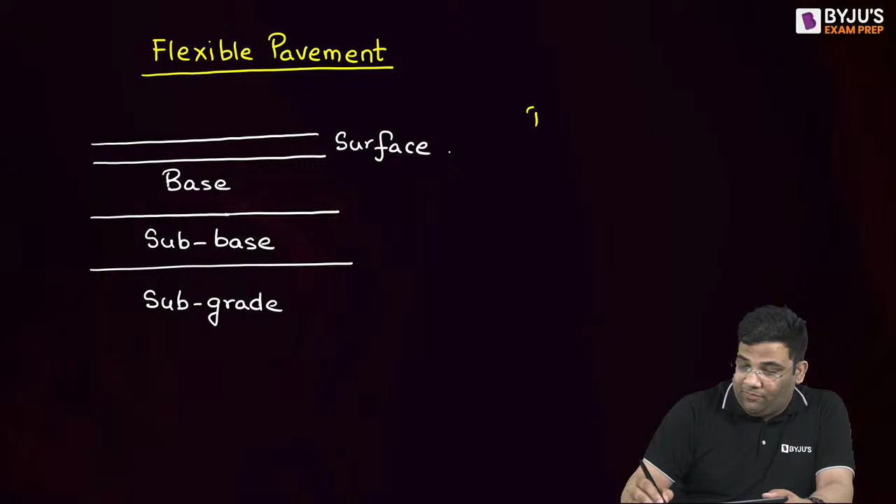The thickness of these layers, that we call the design. When I say design, I am telling the thickness of these layers, the thickness of various layers.

Now tell me, the thickness of layers will depend on what? Give me some idea, you also contribute. Tell me, the thickness of the layers will depend on which factor? Write in the comment section, let us see what are the answers.

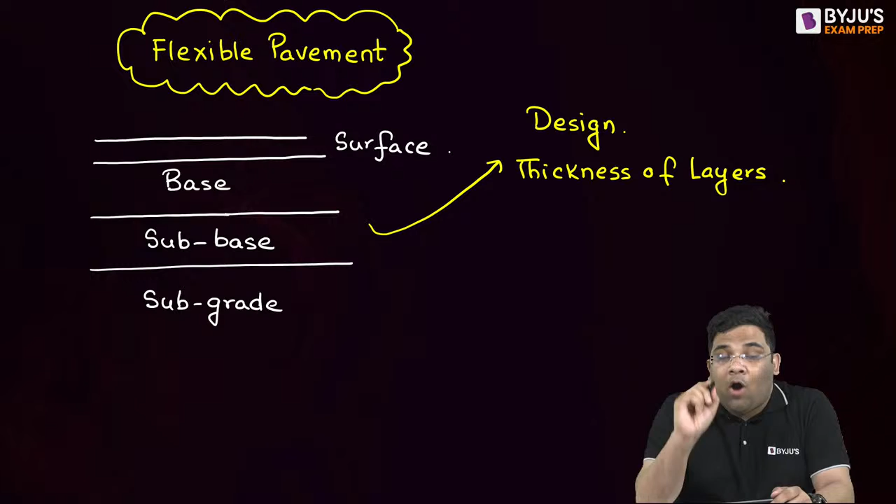Obviously this will depend on many things, but the prime factor is the traffic - how much traffic this particular pavement will be catering to. Based on that, the strength and thickness of the various layers will be decided.

So the first and foremost important thing is the design traffic on this particular road. Suppose I am giving it the name T, design traffic. So the traffic will decide what will be the strength of different layers, what will be the thickness of different layers. Therefore in your GATE examination and many other examinations, they ask questions about your design traffic - what will be your design traffic?

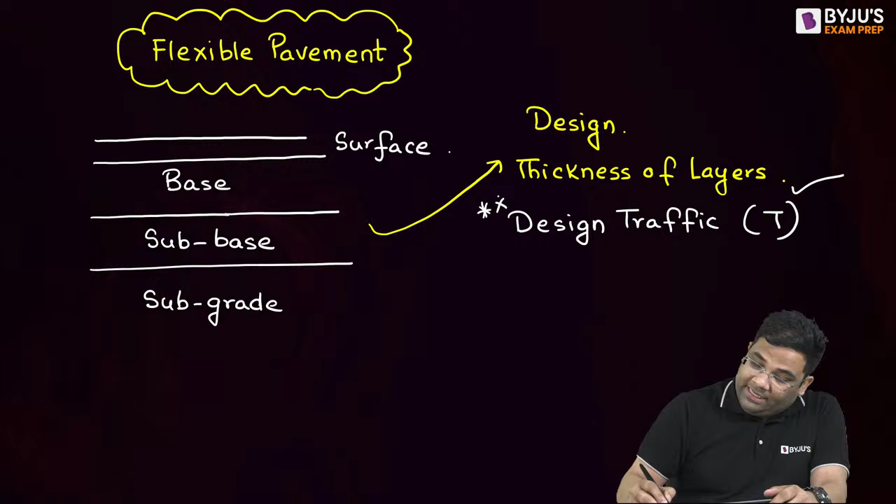Okay, so let us understand how to find out this design traffic T as per your code. Let us start it.

Suppose you want to construct a road between A to B. Now, between A to B, there will be some existing road. That road might be an old road, or it might not be catering to the current traffic, but there will be some road existing already between A to B.

Now from A to B you can do a survey - A to B and B to A, two-way traffic. You will do a survey and find out the daily traffic of A to B and B to A. So in the survey, you will get the daily traffic between A and B.

You will do a survey and find out the daily traffic between A and B. Suppose you are doing this survey - suppose today's date is, sorry, 2022, yes. Suppose you are doing it on October 1. Suppose from today, yesterday, tomorrow you are doing the survey, and this is 1st October 2022. You are conducting this survey, and in this survey you are getting some traffic.

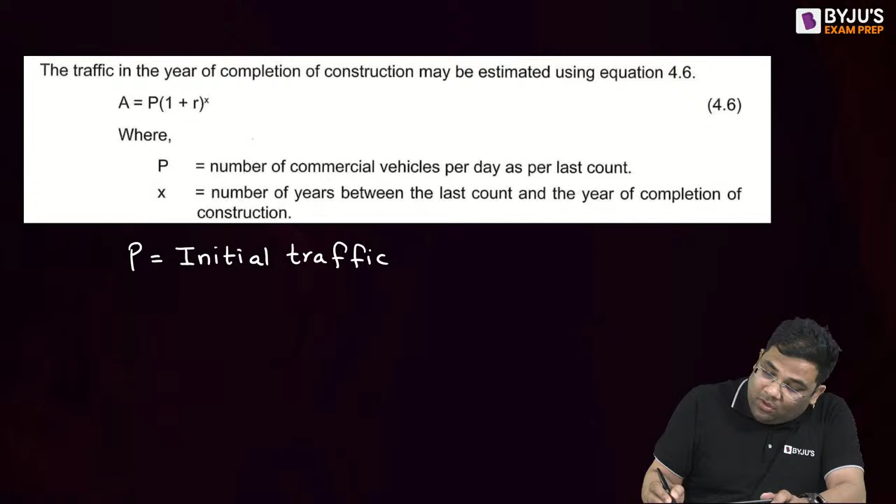P is the initial traffic on the survey day, unit will be CVPD, commercial vehicles per day. And A is the initial traffic on the opening day, the road opening day, when the road opens after the construction.

This is very simple, like amount and principal, which we studied in childhood, right? So this amount is 1 plus R, where R is the annual growth rate of vehicles, and then to the power X. Understood this formula?

Now this is from code, this equation I am not telling, the code is telling. This is from page 17 of IRC-37. Now everybody has understood the terms P and A.

So the road has opened. Suppose the road has opened on 1st April 2023. And on the opening day, the traffic is A, equal to P into 1 plus R to the power X.

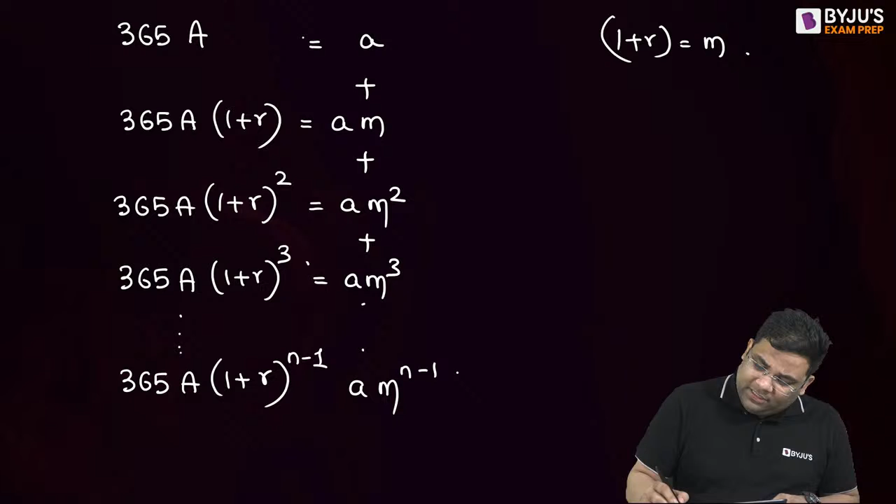Now see all this, you are adding all this to get total traffic. Now tell me, this is nothing but a geometrical progression, right? A, AM, AM square, AM cube - yes, this is nothing but a geometrical progression.

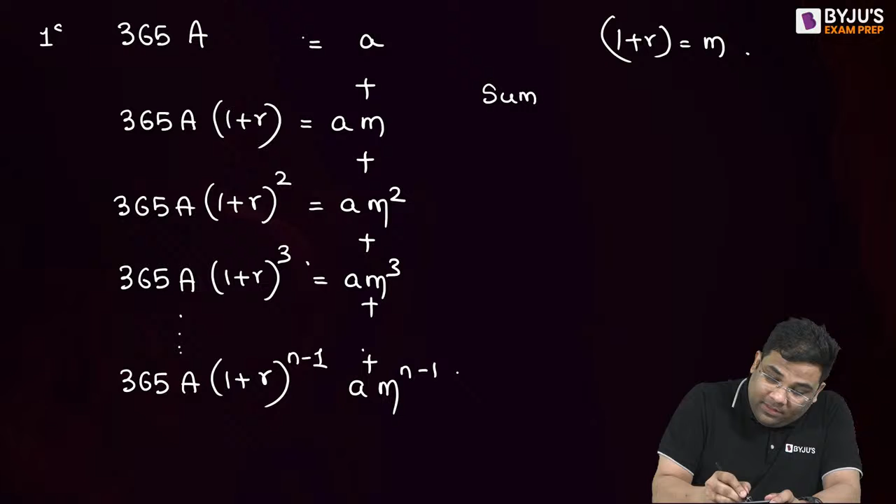And how to find out? These are N terms. This is the first term, and this is the Nth term. So what will be the sum of N terms of this progression?

The formula is, let me write it down, you might have forgotten. The formula is A, the first term, into the common ratio - this common ratio, M is common ratio, remember childhood? Common ratio to the power number of terms minus 1, divided by common ratio minus 1. This is the formula for finding sum of n terms of this geometrical progression.

So when I put the values, A is 365 capital A. M is 1 plus R to the power n. Then minus 1 divided by M minus 1, which is 1 plus R minus 1. So this 1 gets cancelled. I get this term. Does this term look familiar to you? This is 365A into 1 plus R to the power n minus 1, divided by R.

So this is the total traffic in the design life of that particular road. You have to remember this formula, but I derived this formula for everybody's understanding.

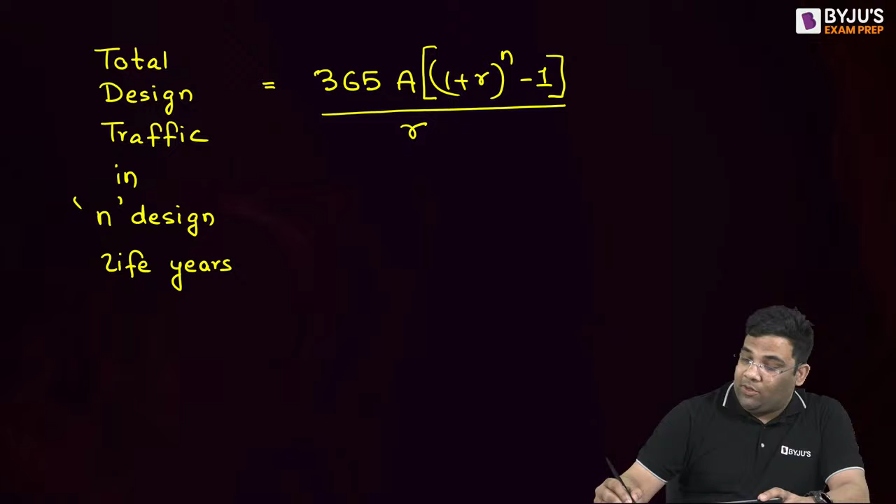Now what is A here? A was P multiplied by 1 plus R to the power x.

Now I will ask you all about this term, you will answer in the comment section. Let us start. I will ask you, what is P? Write in the comment section so that I understand you have understood. Write down what is P, write down full.

Yes, I can say this is the initial daily traffic on survey day, or before the construction, or sometimes they write on last count. Last count means when the last counting was done, and that is on survey day only, right? See the language of the code - as per last count. Last count means when the survey is done.

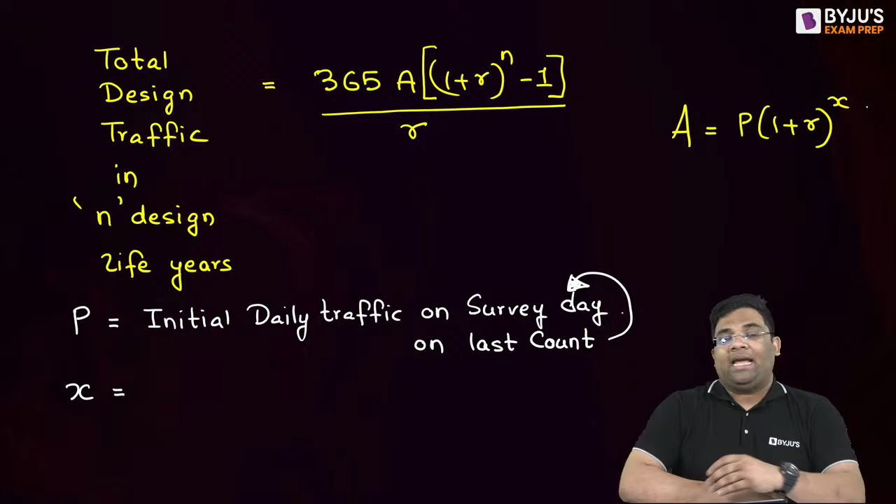Now tell me what is X. Tell me what is X as per understanding from this. I'm waiting. So much time went, right? Okay, writing. Some are watching movie, no movie, please write the answer. What is X?

Time interval between survey, difference of year between survey day and opening of road. Yes, so I can say this time, and this time we will take in years. Very important, this time will take in years. If it's given in months, convert to years. Time in years between last count and opening day. Or I can also call this as the construction period - sometimes it will be equal to the construction period, right?

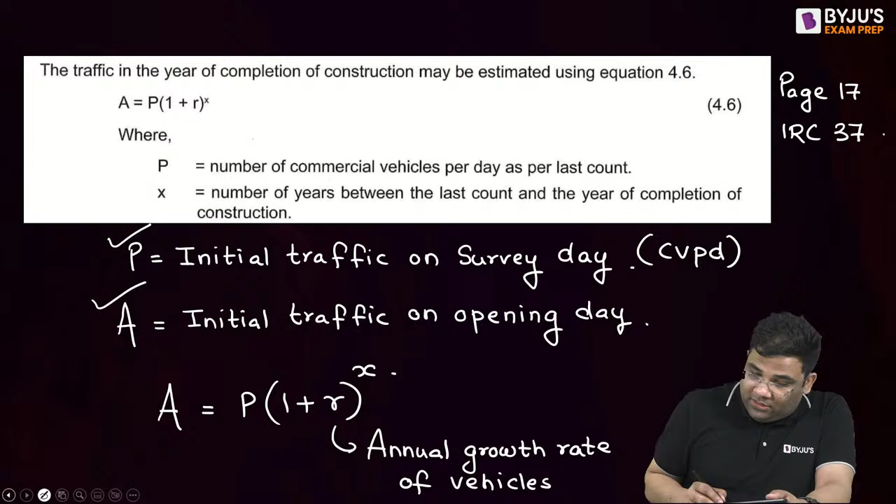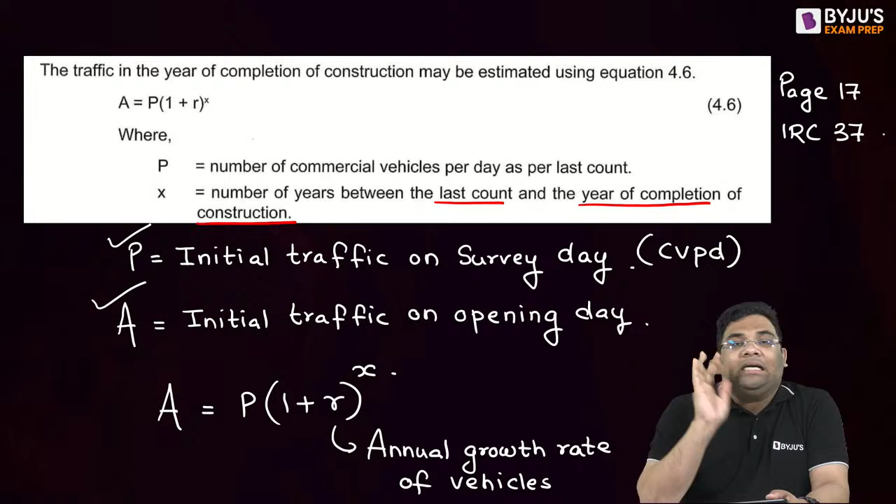Construction period - let us see what code uses. The code is writing number of years between the last count and the year of completion of construction. Same meaning, last count and the year of completion of the construction. Yes? Okay, very good.

So we got our traffic equation also we got. Now tell me, suppose we have, normally roads are multi-lane roads, right? Now roads are what - 2-lane, 3-lane, 4-lane, yes, roads are multi-lane. Tell me, whatever design traffic is coming, will all the traffic pass through a particular lane, or will there be distribution of traffic in these lanes? Yes or no?

It is an interactive session, so be attentive. Yes, so I can say yes, this traffic will be distributed into various lanes. Yes, it will be distributed into various lanes. Okay, so how the distribution happens, that we will understand now. That is very important for your examination, how the distribution of traffic happens.

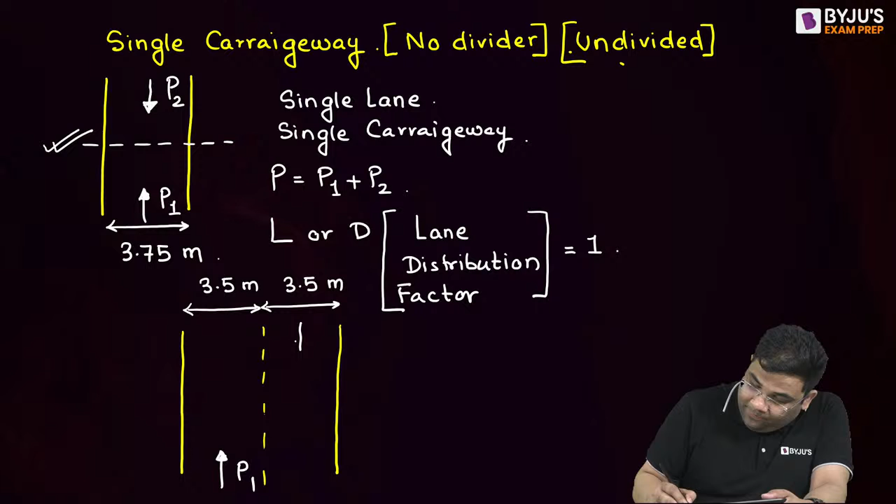Suppose the vehicular movement is P1 here and P2 here. This is known as two lane, but single carriageway. Single carriageway means there is no divider.

So what is this line then? This line is just a line on the road only, there is no divider. What is a divider? Divider means there will be a proper divider like this, with some trees. If I see the cross section, an undivided road will be looking like this, where only some paint work has been done at the middle.

Now divider means there will be some divider here, like this, you see. There will be some construction like this, and some tree will be there. Not such a big tree, just we can say some plantation will be there, some demarcation is there.

So what is the difference now between divided and undivided? If it is undivided like this, just a line is there, a painting is there. Tell me, can P1 go this side, and then P2 can also go this side? Yes, they can go.

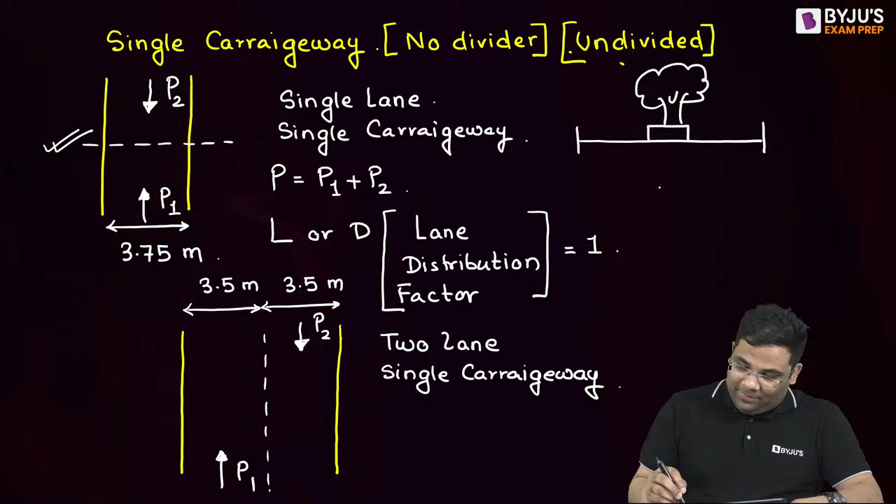Now you will say, sir, we should follow the rules, they should not go. But this 'should not go' is a very idealistic notion, and we don't live in an idealistic world. So that doesn't apply. We cannot say should not go, if there is provision, they will go. Suppose the road is empty, this P2 can go that side. But if there is a proper divider, then P1 and P2 cannot cross to the other side.

Understood the difference between a divided and an undivided highway? Very good.

So when it is undivided, tell me how much traffic I should consider for a particular lane design. Should I consider P1, or P1 plus P2? Tell me, since we are studying single carriageway only, what traffic will I consider? I will consider P1 plus P2, because both traffic streams can pass through this particular section.

Both can pass because there is provision for them to pass. So in undivided, whether it is single lane or two lane, doesn't matter, the traffic considered will be P1 plus P2. This means the total traffic will be the addition of traffic moving in opposite directions. Now, the lane distribution factor here will be how much?

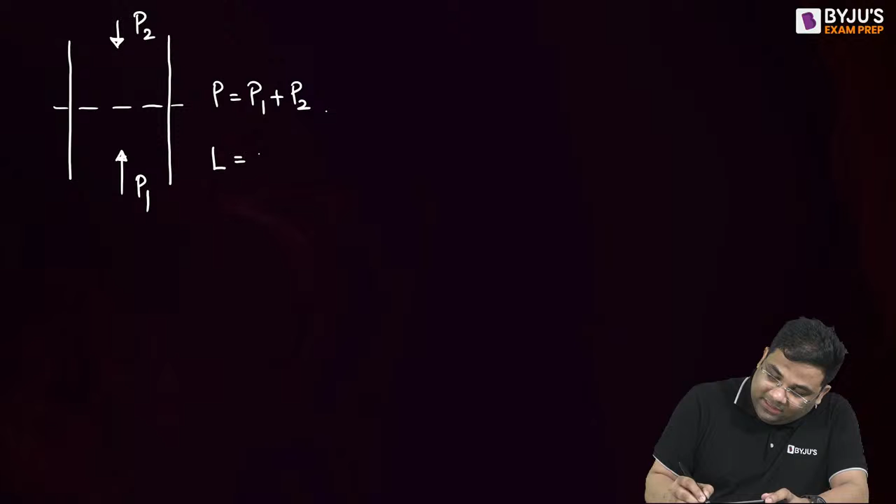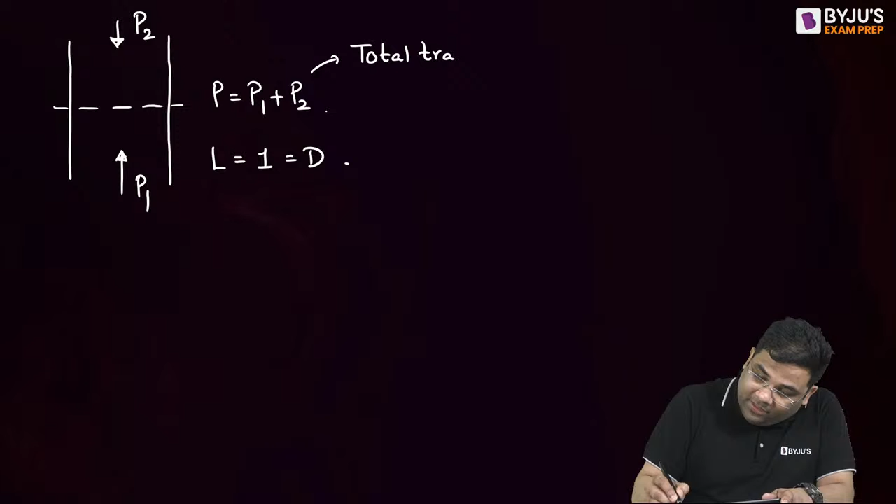So first, what did the code tell? If it is a single lane, then everyone has to pass. So P1 and P2, total traffic is P1 plus P2. L will consider distribution factor as 1, either expressed as L or as D, lane distribution factor. Means there is only one lane, na? Yes, see, this is total traffic, and all the traffic is distributed into this particular lane.

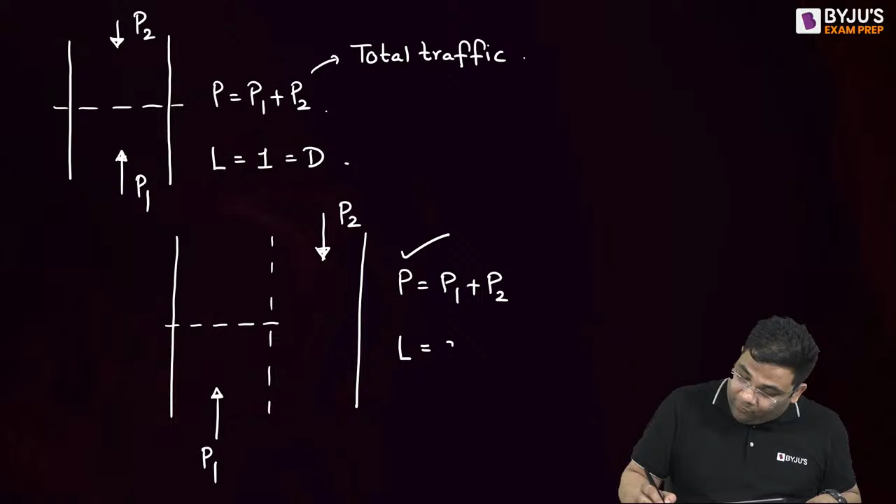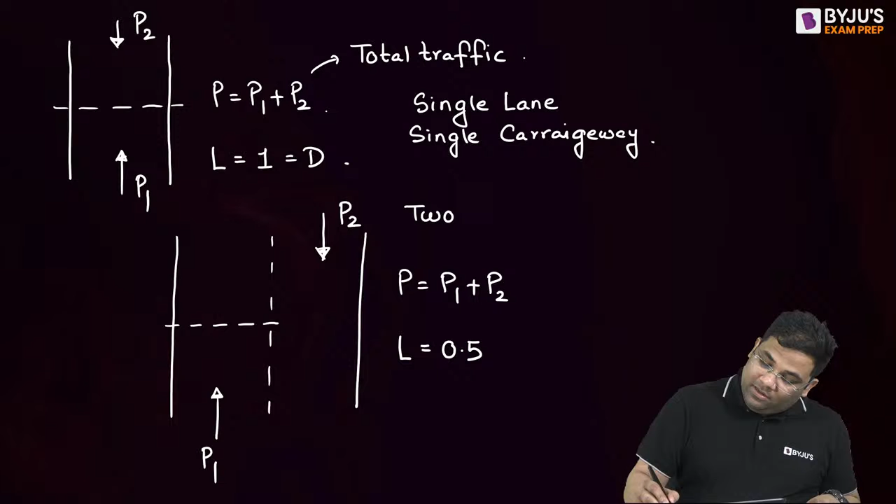So there is only one lane. Then what did code tell about? About your two lane undivided roads. Here it is P1, here it is P2. So total traffic consideration will be P1 plus P2. But if we consider a single lane, a particular lane, then only 50% of this P will pass through it. So L is how much? 0.5. Everybody understood the difference between single lane single carriageway and two lane single carriageway.

It's clear or not? Tell me. If it is clear, we'll move to the next thing. Yes, we will go to the next thing. That is what? That is your four lane single carriageway.

4-lane single carriageway means what? Only the signs will be there. The sign will be there. Painting will be there on the roads, you might have seen such roads, right? But there will be no permanent demarcation, right? There is no permanent divider, no divider, undivided. Single carriageway means undivided, remember that. So this is 4-lane undivided, or I will say your 4-lane single carriageway.

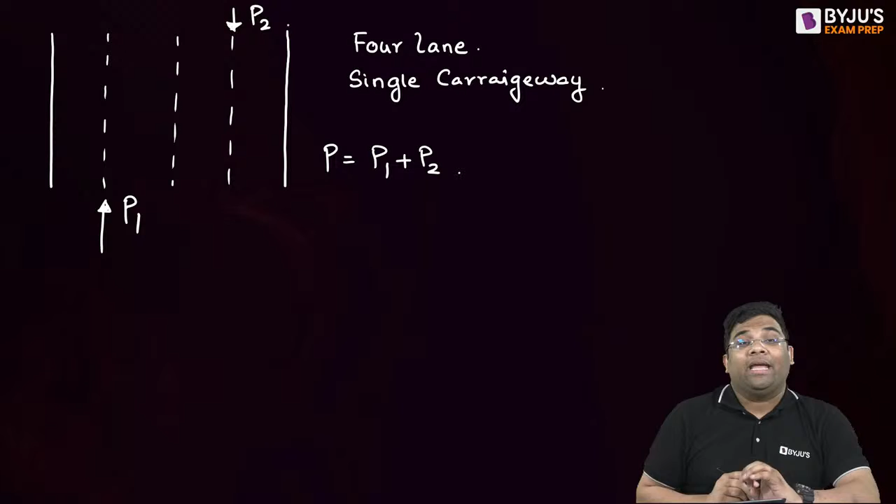Okay, now here suppose traffic is P1, and here suppose traffic is P2. Now this P1, P2 can pass anywhere, right? So total traffic consideration will be how much? P1 plus P2. But if I consider only a particular lane, so what will be the lane distribution factor? Tell me from your common sense, what will be your lane distribution factor for one of the lanes?

Why 0.5? For one lane. Arey, write down, Baba, you are not giving exam. Be interactive, Baba. You might be wrong, na? Who is killing you? Nobody is killing you. Why are you so afraid? Write down whatever you feel.

Yes, the distribution factor should be 0.25. You see, this P1 and P2 can pass through any lane, it can pass through any lane. But code has to come to a particular conclusion about how much should pass through one lane. And there are 4 lanes, so I can say that 25% will pass through each lane, yes or no? See, when it was single lane, we said total traffic is P1 plus P2, and since there is only one lane, all have to be distributed in this lane only, therefore lane distribution factor was 1.

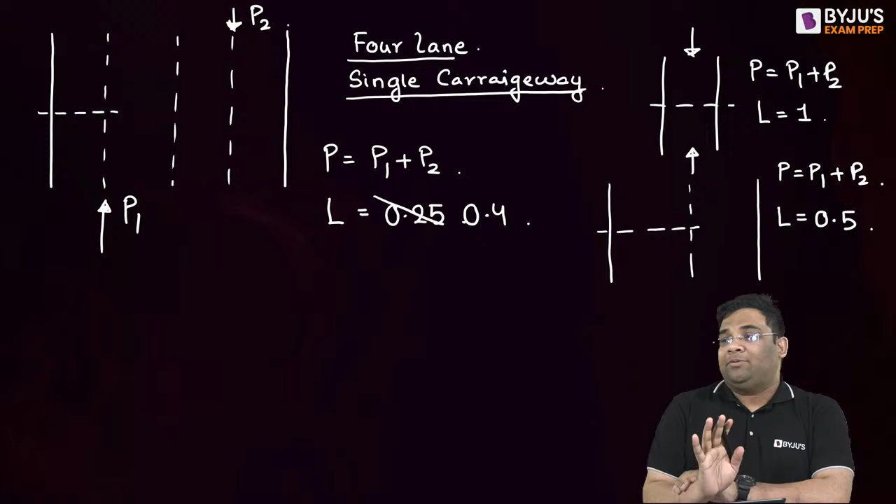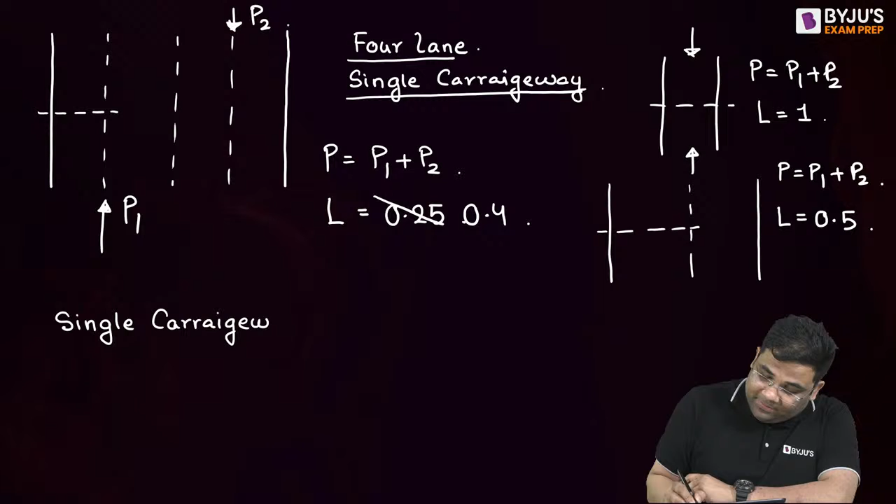Understood everyone? These 3 types of roads, everybody understood or not? Yes. Now tell me, single carriageway means what? What is the meaning of single carriageway? Write down in the comment section. What is the meaning of single carriageway? Write down in the comment section. Yes, very good, undivided highway.

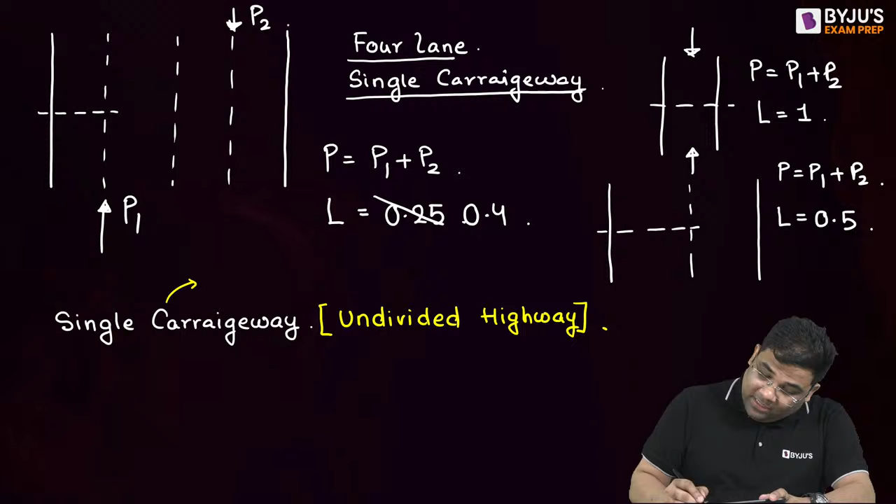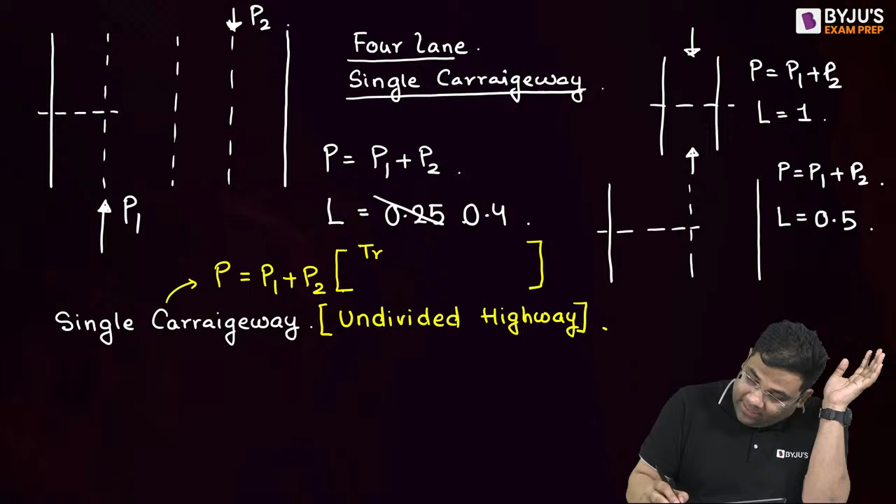For undivided roads, in a single carriageway, the traffic considered is the sum of traffic in both directions. So P is equal to P1 plus P2. In single carriageway, all traffic should be considered - traffic from both sides are considered, because there is no divider, so anyone can pass through any lane.

Yes, but still there has to be distribution. We have 3 types of roads: single lane, 2 lane, and 4 lane. The lane distribution factor for single lane is 1, since everyone will pass through this. For 2 lane it is 0.5, a 50% distribution, and for 4 lane it should be 0.25, but the code changes it to 0.4. So everybody understood the concept of single carriageway, undivided highway, and single lane, 2 lane, 4 lane.

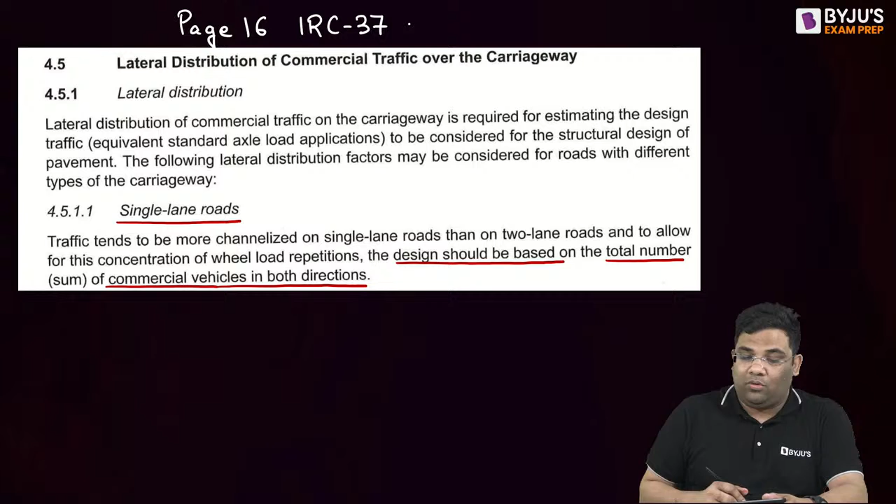You can see single lane roads written here. In single lane roads, the design should be based on the total number of commercial vehicles in both directions.

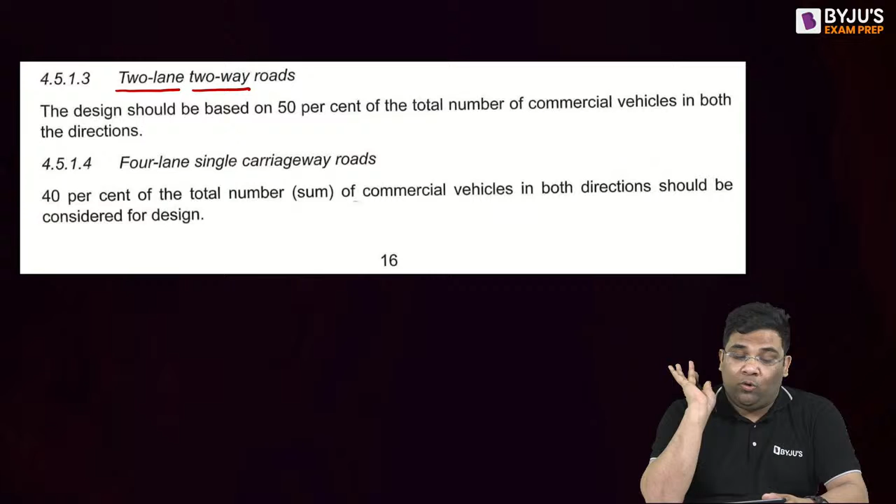Next, what is written for two-lane, two-way roads? Design should be for 50% of the total number of commercial vehicles in both directions. So the indirect meaning is, total number means P1 plus P2, and 50% means the lane distribution factor is 0.5.

Now see, for 4-lane single carriageway, it writes 40% of the total sum of commercial vehicles in both directions. So P will still remain P1 plus P2, and it has to be distributed by 40%, meaning 0.4. The code has to be understood by people who understand it properly, and then you understand from them. If you start randomly reading the code, you will understand something else and there will be a lot of misunderstanding, which will show up in the examination.

But now everyone has understood single carriageway. Single lane, 2-lane, and 4-lane - whatever the code writes is fine, but remember what I am telling you: here total traffic will be P1 plus P2, and the distribution factor will be 1 for single lane, 0.5 for 2-lane, and 0.4 for 4-lane.

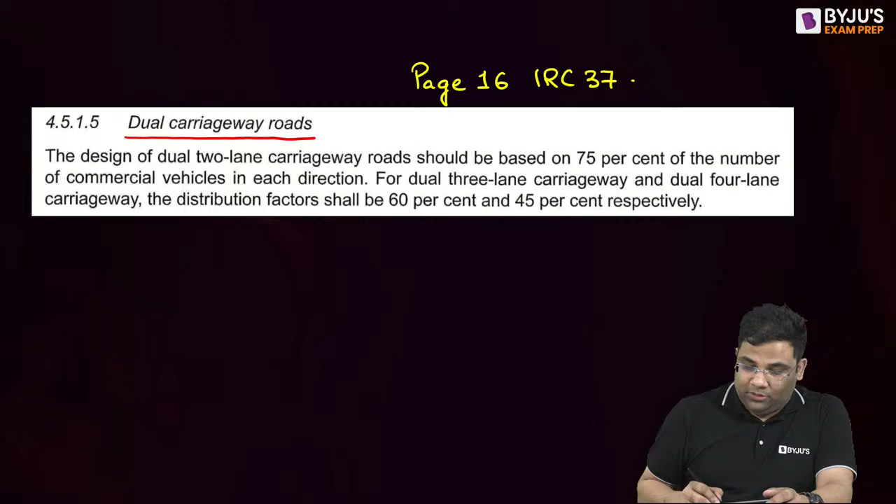Let us come to the next thing, which is dual carriageway. First we'll understand dual carriageway ourselves, then we will see the language of the code - this is also from page 16 of IRC-37. So when I say dual carriageway, what is the meaning of that? Tell me, what is the meaning of dual carriageway?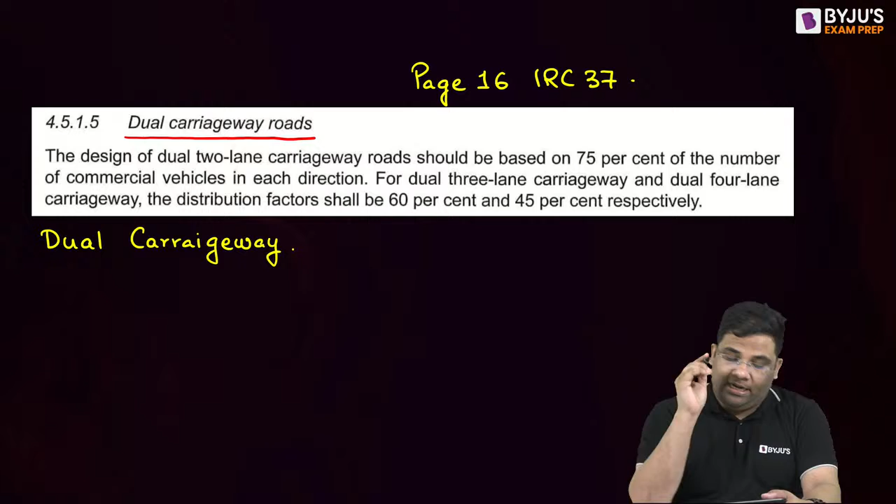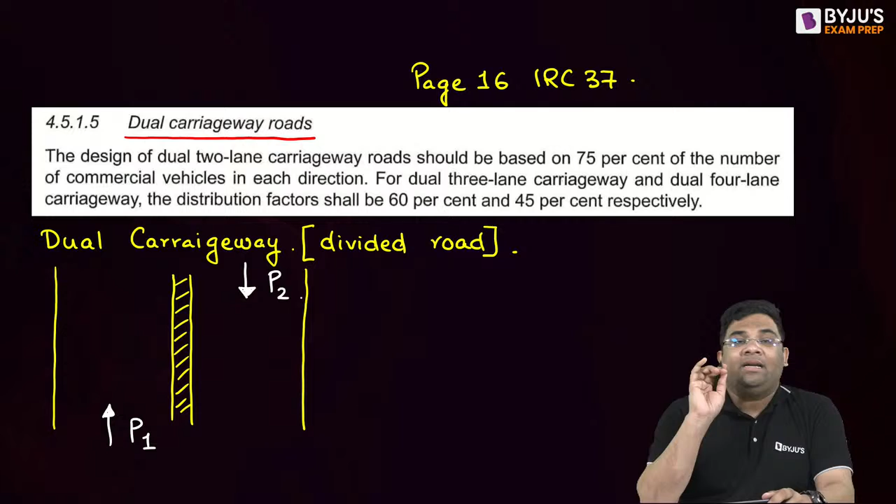Divided road - very good, dual carriageway means divided road. So we'll have a divider, and then some lanes to this side, some lanes to this side. Now suppose here the traffic is P1 and here the traffic is P2. Now can this P1, P2 interchange? Tell me, can this P1, P2 interchange?

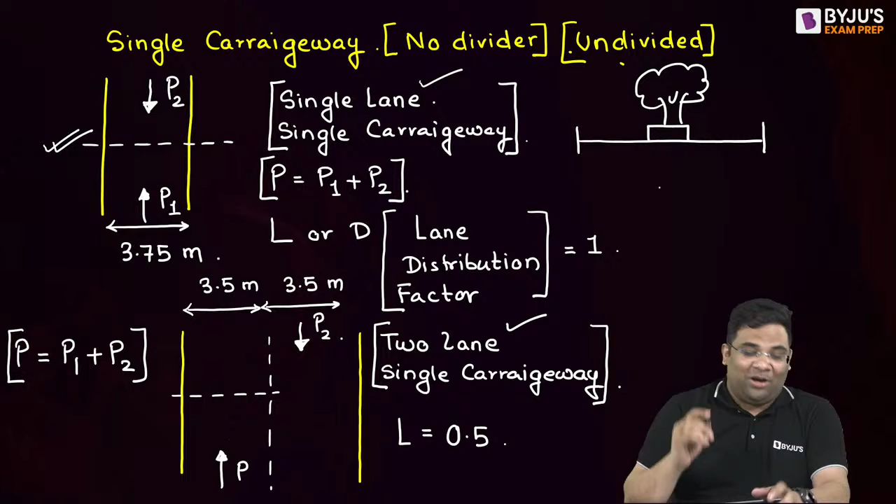No, they can't cross over. You see this diagram? If you want to do some stunt, that's a different thing, like some Rohit Shetty movies, Bollywood, Tollywood. In those movies it is possible, but in real life it is not possible, right? So vehicles can't cross. So here, what will the design traffic be?

For this dual carriageway, remember that the design traffic will always be the maximum of P1 and P2. We'll design as per the maximum one, because they cannot cross each other. Understood everyone? But in case of single carriageway, they can cross, therefore I have to consider both of them.

Now in your dual carriageway there are three options. The three options are dual 2-lane, dual 3-lane, and dual 4-lane. What is the meaning of dual 2-lane? It means this side 2 lanes, this side 2 lanes. Can I say this also as 4 lane divided, yes or no? Dual 2 lane, everybody understood or not?

Dual 2 lane is 4 lane divided. Understood everyone? Yes, 2 lane this side, 2 lane this side. Now, tell me what will be this one? Dual 3 lane.

Dual 3 lane means 3 lane this side, 3 lane this side. What will be the other name to this? You tell me. Everyone please be active.

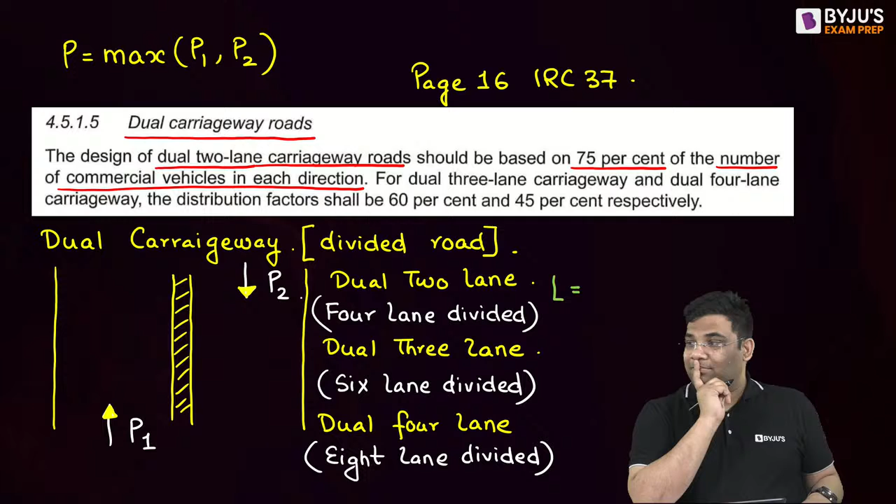75%. That indirectly means what? If they're writing 75% of that traffic, what is the lane distribution factor L then? Tell me. 0.75.

And then you see what they're writing: for dual 3 lane carriageway and dual 4 lane carriageway, the distribution factor shall be considered 60% and 45% respectively. So here it will be 0.6, and here 0.45. Clear? Everybody is clear what the code wants to tell us.

Now let us summarize whatever we have studied till now. The design traffic will be equal to the formula: 365 A (1 plus r to the power n minus 1), this has to be in full bracket, divided by r. This was the traffic, then I'll distribute it by multiplying with the lane distribution factor. And this A is equal to P into (1 plus R to the power X).

And this P, which I considered for single carriageway or undivided roads, I will take as P1 plus P2, meaning the traffic in both directions. Whereas in dual carriageway, I will take this P as the maximum of P1 and P2. Understood everyone?

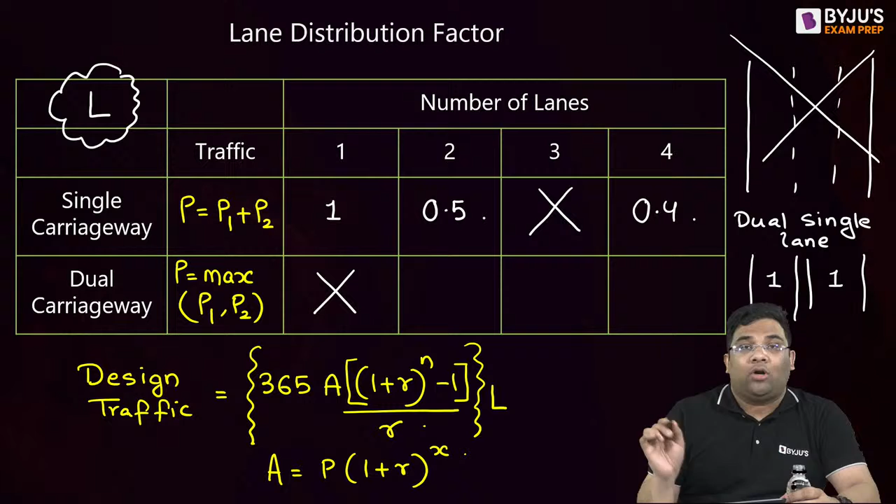It will be a waste of money, right? So the code tells us that we have to start with at least 2 lanes on each side. So this is not allowed, because this is dual single lane. This is not allowed.

Next is dual 2 lane. Means I can say 4 lane divided, right? This side 2, this side 2, right?

Now tell me, what is the value for this dual 2 lane, or 4 lane divided? What is the lane distribution factor? 0.75. Very good. Then we have dual 3 lane.

Dual 3 lane, tell me, what is the lane distribution factor? Dual 3 lane, or I can say 6 lane divided. This is 0.6. Then we have dual 4 lane.

Dual 4 lane, means 8 lane divided. What is the answer? 0.45. So everybody understood everything about lane distribution factor.

So let us go back to design traffic. This design traffic, ladies and gentlemen, is 365 A [1 plus r to the power n minus 1] divided by r, into lane distribution factor, that distributes into lane.

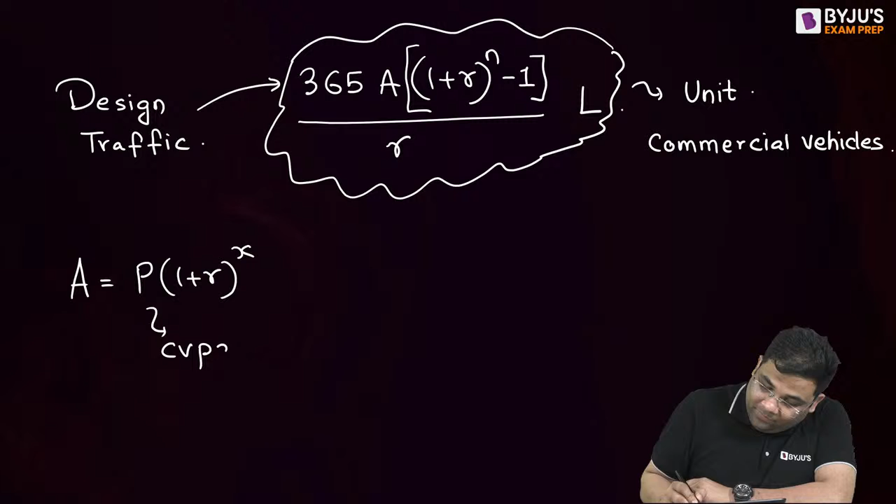It is commercial vehicles, it is not per day. I will tell why, just remember it is not per day. You see, A was P into 1 plus R to the power X, this is in commercial vehicles per day, so A also becomes in commercial vehicles per day.

But when you multiply this by 365 days, it gets converted into the number of commercial vehicles. Understood this concept or not? Yes. So it is in commercial vehicles only.

Commercial vehicles. Now, when it comes to design of the roads, means finding the thickness. So the code mentions the thickness of the pavement and draws curves for thickness of the pavement versus standard axles. What is the meaning of this?

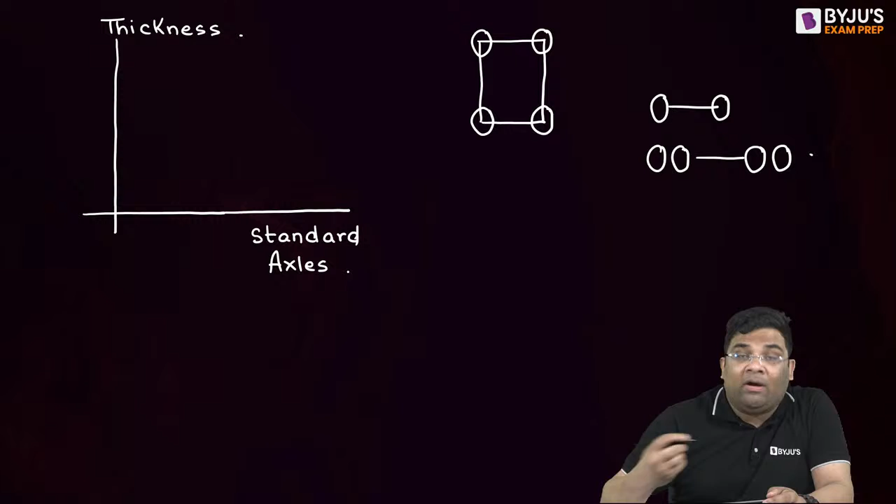See, a particular commercial vehicle will have axles, at least 2 axles will be there, right? What is an axle? We can say this is one axle. We have different types of axles, we can have 2 tires on each side, or 1 tire on each side, right? So tell me, number of commercial vehicles, will it be same as the number of your standard axles?

Tell me, number of commercial vehicles, will it be equal to the number of standard axles? Yes or no, tell me. Will it be equal to or not equal to? Tell me.

Hurry Baba, write down. Number of commercial vehicles, will it be same as standard axles or not? I am asking, answer Baba. Why are you fearing? You are not giving an interview. You can be wrong, be interactive.

Okay, there is some problem with the comment section. Comments yes? Arey, how will it be yes, Baba? Therefore the people are not replying.

Arey, one vehicle has at least 2 axles, and some vehicles have more than 2 axles also. So how will the number of vehicles be equal to number of axles? This will never be equal, na? Not understand.

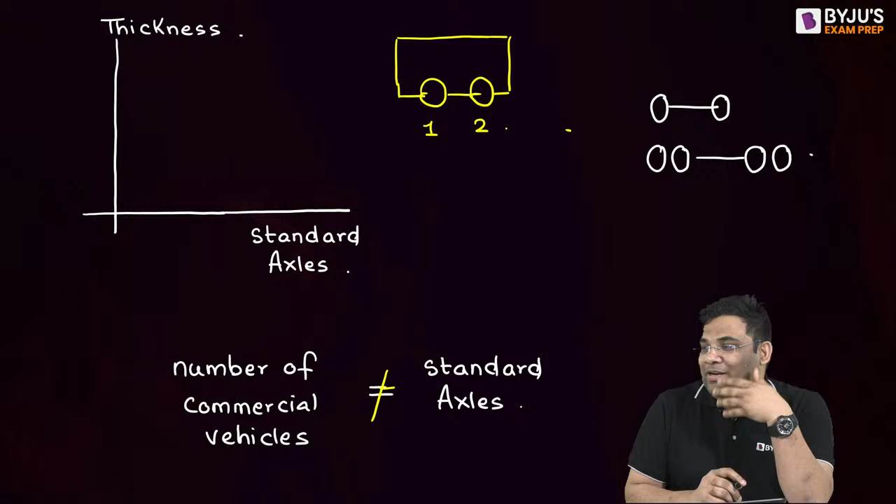Other students, answer me. Now tell me, will the number of commercial vehicles be equal to the number of standard axles or not? Tell me.

No, it will not be same, Baba. It will not be same. Yes, so the number of commercial vehicles won't be equal to the number of standard axles. You're not understanding? I'll explain again. Since a particular vehicle will have at least 2 axles, right? Some have 3 axles, some have 4 axles. So how will the number of vehicles be equal to the number of standard axles?

It will not be. But the code mentions the thickness in what? The curve of, suppose there is a curve like this, and from this curve we are finding the thickness. Suppose you find out the standard axles, the traffic in standard axles, and then from here you are finding your thickness. So you can clearly see that this is as per which code? IRC-37. Yes, so therefore you need to convert the traffic from commercial vehicles to standard axles.

Understood? So this formula gave us the design traffic in commercial vehicles. It gave us in commercial vehicles. But we want in what? Standard axles. Why do we want it in standard axles?

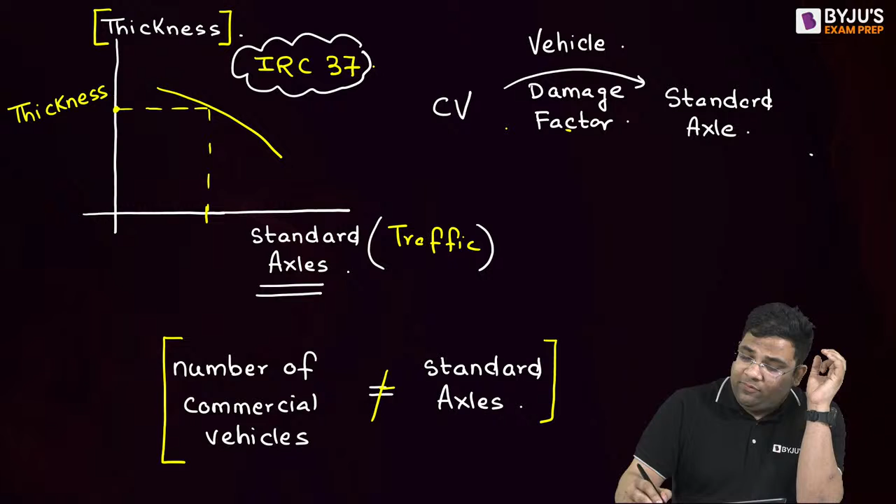Vehicle damage factor, by a factor known as what? Okay Karthik, I wrote correctly. By a factor known as what? Vehicle damage factor, also known as V. Some books write V or F. So if I ask you what is a vehicle damage factor, the vehicle damage factor converts the commercial vehicles into what? Standard axles. Understood everyone?

Okay, so now how to find out the vehicle damage factor? I have already taken a particular lecture on this YouTube channel, so I request you, you can type this name on the YouTube channel and see this lecture. It is a 51 minute lecture. I have already explained this particular concept, how to find out your vehicle damage factor, that is F or V.

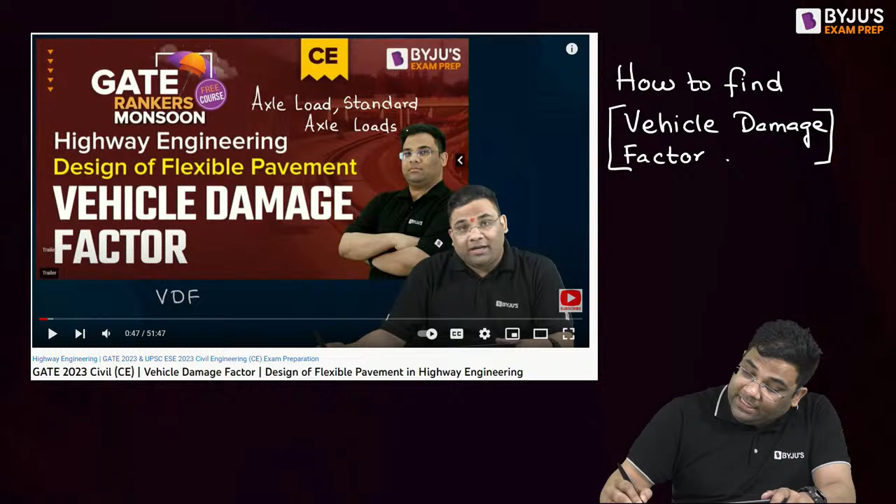Now coming to the formula, this is the grand formula which IRC-37 mentions on its page number 17. Now you can easily understand this formula. What is written? You see, the design traffic in terms of what? Cumulative number of standard axles.

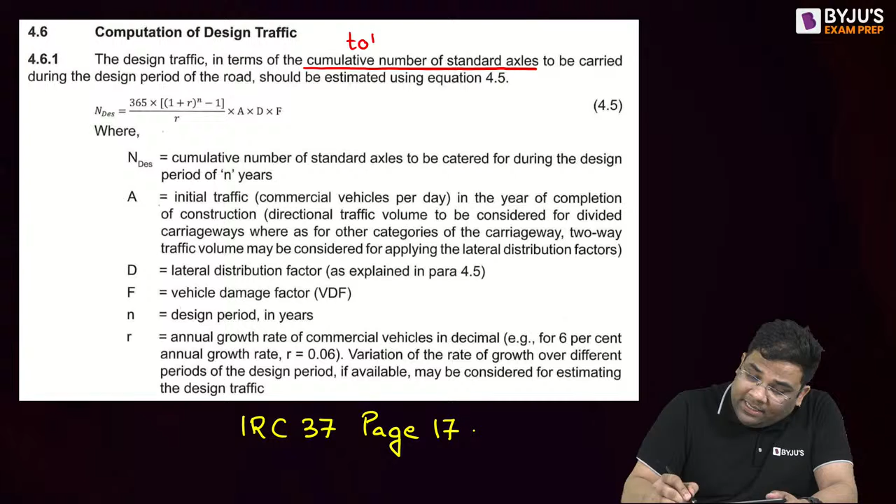What is the meaning of cumulative number of standard axles? It means total number of standard axles. Okay, what is the formula you see? 365 is there, then A is there, 1 plus R to the power N minus 1, by R, then we have this D and F.

Now what are these terms? Design cumulative number of standard axles, that means the traffic in terms of standard axles, catered for a period of N years. What is N years? Design period or the design life of the particular road.

What is F? It is the vehicle damage factor. What is D? That is the lateral distribution factor, or I can say lane distribution factor, right? What is A? You see, A they have written as the initial traffic in commercial vehicles per day in the year of completion of construction, or the opening day, right?

And what is R? The annual growth rate. For example, if it is given as 6%, what will we take? 0.06. So now we've understood the whole code, or rather, the design traffic component of the code.

So let us solve some questions now. It's questions time. If everyone is ready, let us solve some questions. The first question, answer this. First we'll see some objective 1-2 mark questions, then move on to numericals.

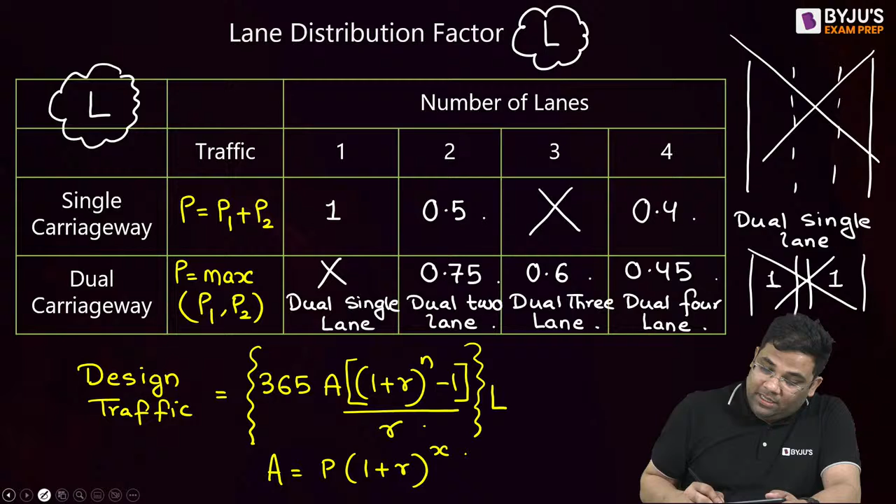Understood? If you have not understood this, or you have understood but might not have remembered it because you just saw the things, I will request you: for answering such questions, you should understand this table properly, this explanation, all these things properly.

Very good. Let us go to solving more questions. Now tell me this answer. Very easy question. Tell me: a vehicle is considered a commercial vehicle when its weight is more than?

So all the lane distribution factors, they can ask in a 1 mark question. Yes, commercial vehicle means the weight is more than 3000 kilogram.

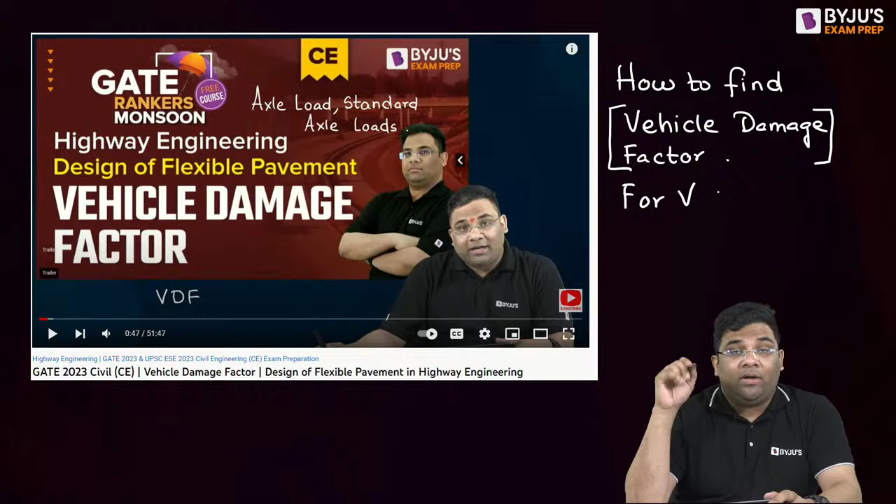And there are also many questions which I have solved in this video on vehicle damage factor. I will request you to please go to this video and watch it. Yes, you'll understand how to find it. Let us solve more questions on traffic.

So these questions, I will solve 3 for your understanding and 2 are homework. Let us start solving. For a 2-lane road, now tell me, is this single carriageway or dual carriageway? Tell me.

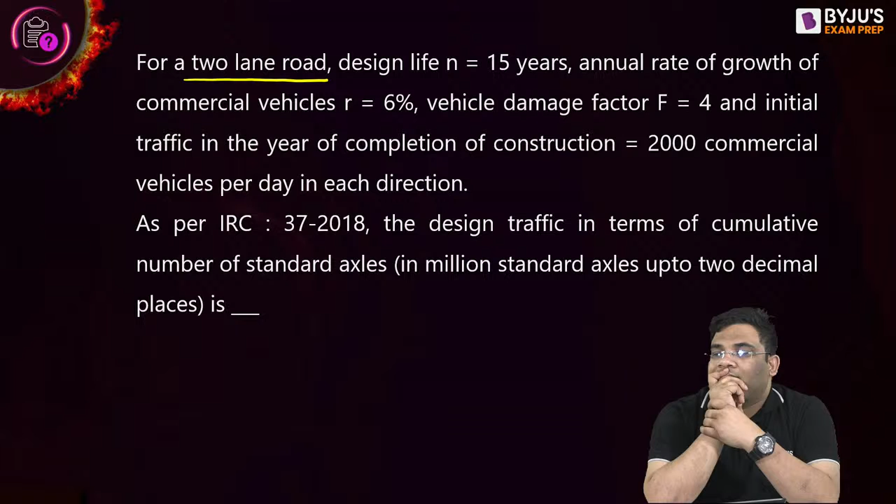Single carriageway. Until the time they don't write the word dual, it is single carriageway by default. So this is single carriageway 2-lane. Now we'll see different factors.

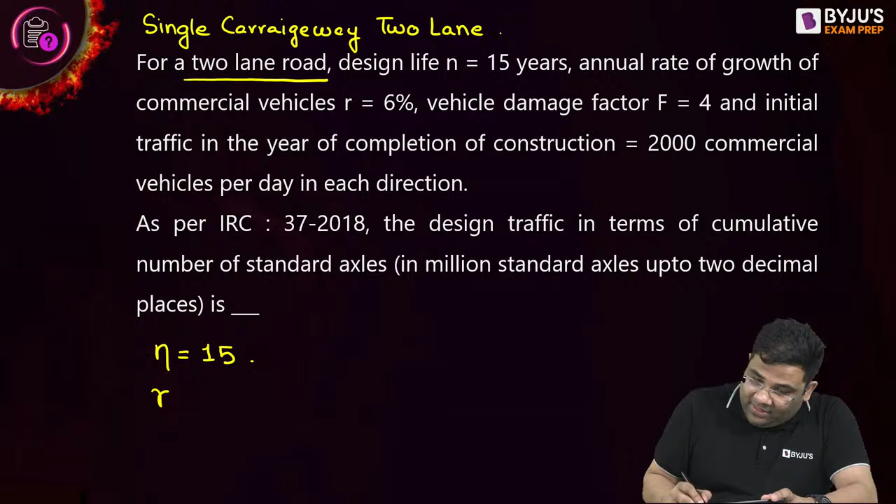Design life is given as 15, we'll write 15. The rate of growth of commercial vehicles is given as 6%, we'll write 6%. The vehicle damage factor is also given to us. It is written as 4.

Then it's written: the initial traffic in the year of completion. Yes, directly they have given this. They have not given P. They are directly given A, right? See, initial traffic on the survey day is P, but here they have given it on the year of completion, meaning directly they have given A. And what have they given about A? 2000 commercial vehicles per day in each direction.

Yes, that means it's a 2-lane road. And they are telling here this side is A1 and this side is A2. Now tell me, for the total traffic will I consider A1 plus A2, or will I take A equal to maximum of A1 and A2? Tell me which one I will choose, first option or second one?

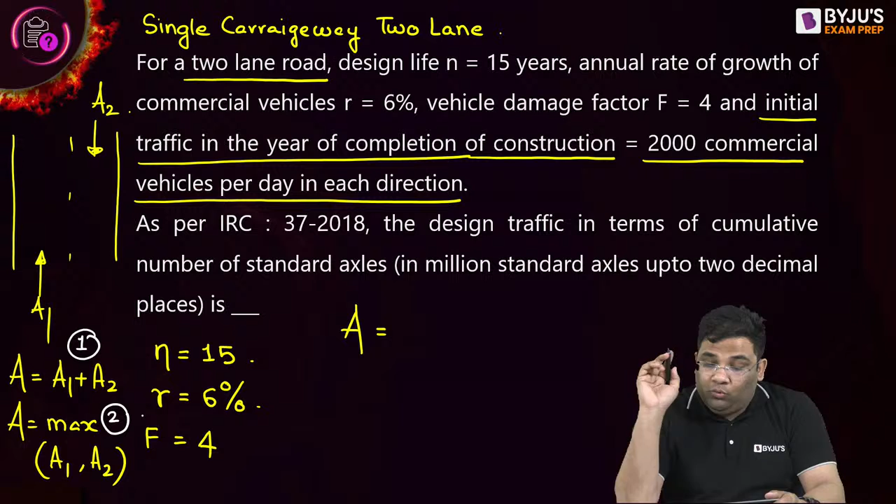For finding A, what is written? 2000 commercial vehicles in each direction, meaning here 2000 and here 2000. Which one will I consider? I will consider 1, because it is written single carriageway. Single carriageway means you have to consider the traffic in both directions. Here it is written only in each direction, meaning one direction. Therefore A here will be 4000. Everybody understood why A is 4000?

First of all, why is it A? It is A because directly they have given the traffic on the year of construction, completion of construction. That is directly A. But they have given in one direction, in each direction. But when we are considering for a single carriageway, we have to consider both the traffics.

Therefore it became 4000. What will be the lane distribution factor? Tell me, what will be the lane distribution factor here? Come on, see your notes and tell. Who is telling you to remember and tell? You are not writing notes. You should write notes. Yes, it is 0.5 from the table, if you remember, right?

Single carriageway, 2 lanes, 0.5, 50% distribution, right? Now you can easily find out the traffic. Find out traffic, use the formula. So traffic will be equal to, I can say, the design traffic T, or suppose they have written N. Some books write N, some books write T, design traffic.

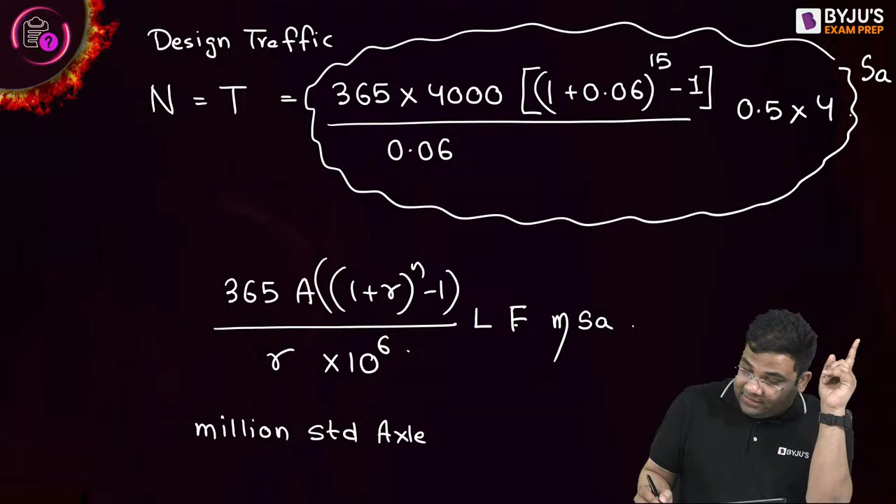And then lane distribution factor, when you multiply this F, that vehicle damage factor, it converts into standard axles. But this number is very high, so I divide by 10 to the power 6. So that will convert into MSA. SA is what? SA is standard axles. MSA is million standard axles. So by this the answer is 67.97.

As you can see, is the question lengthy? No, this question will be a standard 2 marks question in GATE. Yes, this question will be a standard 2 marks question in GATE, and ladies and gentlemen, they will be conceptual. Here you see there were two concepts: one was how to find out A, and second was how to find out your lane distribution factor. Rest everything was given to us.

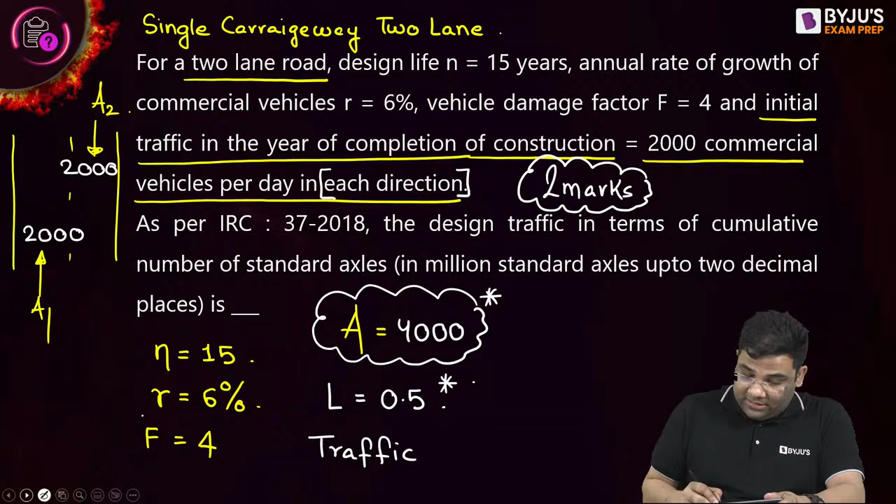Now let us solve the last question. In this question, it is given: dual 2-lane carriageway. Clearly written, right? Dual 2-lane carriageway having traffic in each direction at 3000 CVPD. Initial traffic in the year of completion.

Tell me, A will be how much here? Tell me, what will be the value of A here? Is it 3000 or 6000 or anything else? What will be the initial traffic here? Tell me, it will be 6000 or 3000 or what?

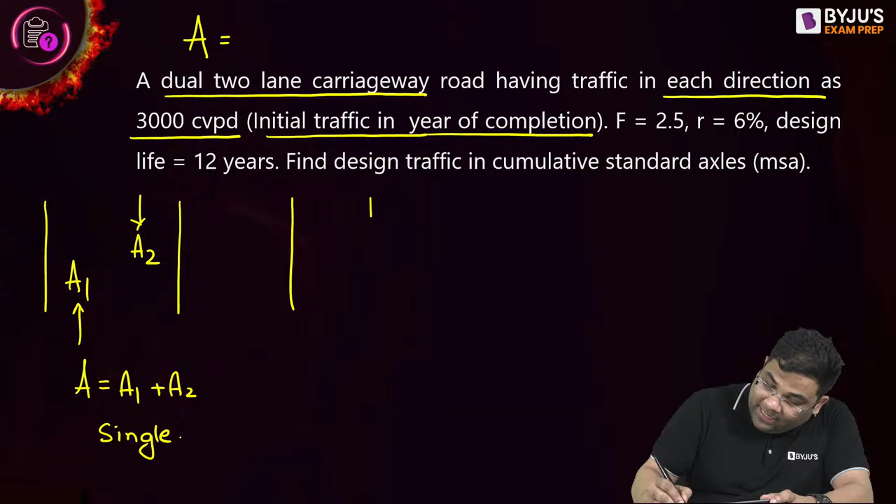See, when it is single carriageway, what do you do? A1 plus A2, or P1 plus P2. Either you can do A1 plus A2 or P1 plus P2, right? Here it is A1 plus A2 for your single carriageway. Now for a divided or dual carriageway, you take the maximum of A1 and A2. Here nothing is mentioned, that means in each direction, here also 3000.

Here also 3000. So here A will be how much? 3000 only. Everybody understood this or not? How to take P or A in such questions - that is very important, right? That is very important.

In the previous question, we can see that there it was single carriageway and the traffic in each direction was given. Therefore I have to add both directions, single carriageway. Whereas here it is dual carriageway and therefore I will only consider traffic in one direction, and both directions it is the same. So I took the same one.

Understood, right? Your vehicle damage factor is given, growth rate is given, design life is given. So tell me, what will be the L here? What will be the land distribution factor here? Tell me.

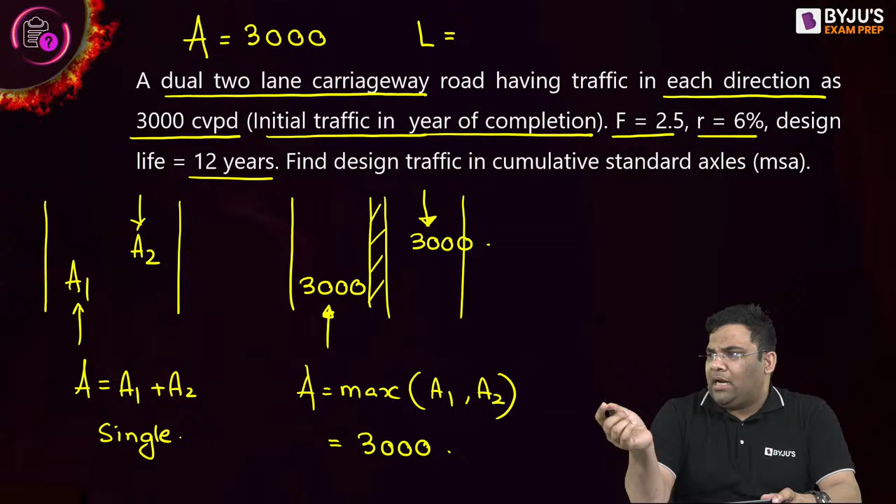0.75. Very good. See your notes. It is 0.75 for dual carriageway, 2 lane. Very straightforward. Solve the question.

See, very easy. Design traffic will be 365, A is your 3000, then 1 plus R is 0.06, for 12 years, then minus 1. This has to be one single term, divided by 0.06. Then lane distribution factor is 0.75, vehicle damage factor is 2.5. Divide by 10 power 6 to get it in millions of axles.

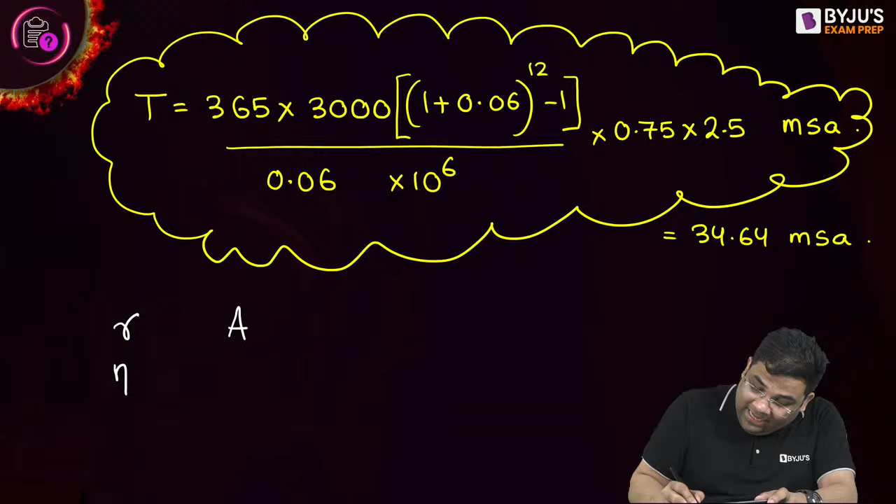Very good. Now you see, in the examination, among all these terms, rate will be given to you, so no issues about that. N will be given to you. Three things there will be major confusion about: one will be A, next will be L, and the next will be vehicle damage factor also.

In today's lecture, I am mentioning the vehicle damage factor, but they might not give the vehicle damage factor in the exam. In both the questions today I mentioned it, but they might not give it to you, so you should know how to find out the vehicle damage factor. For that, you should see that particular video which I mentioned.

Yes, I have taken one lecture on that, you just revisit it. If you have seen the lecture, revisit it; if you have not seen it, then see it. So these three things you should be able to tell. A I made you understand today, lane distribution factor also I have explained in detail today, and vehicle damage factor I explained in that video, so you can refer that.

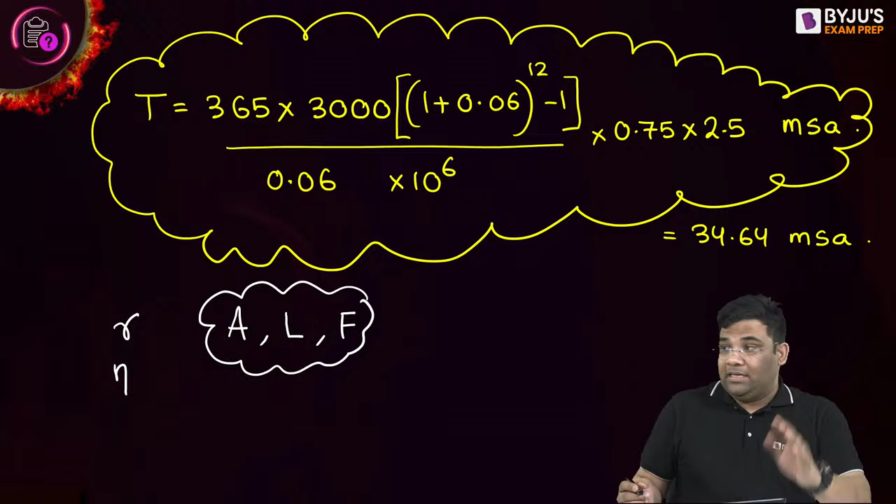Let us solve the last question for today. Okay, beautiful question, you see. Now it is written a 2-lane load—it is not load, it is road. A 2-lane, it is not written properly.

2-lane, 2-way road actually. It is 2-lane, 2-way road. That means what? It is a single carriageway. Okay, nothing is mentioned means what? It is a single carriageway.

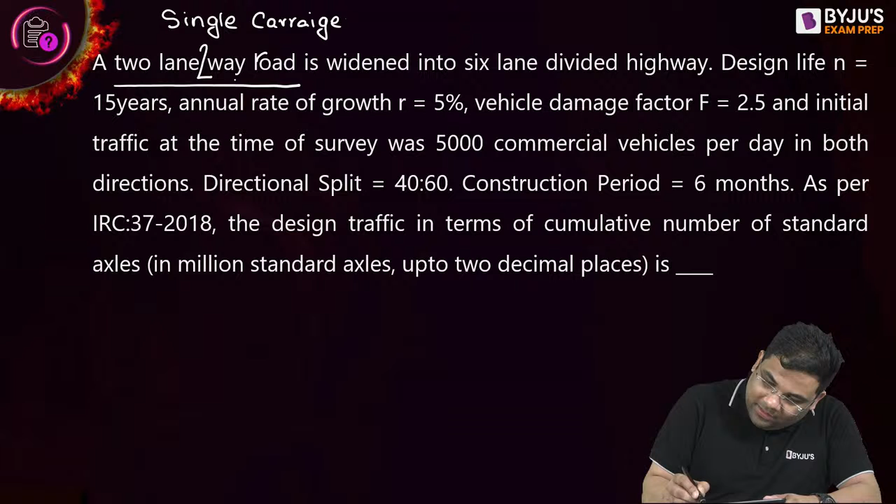It is widened into a 6-lane divided highway. Now you might be seeing in your areas, in many areas development is happening, right? Road construction is happening, so there will be already some road, yes. Now that road changes, so some road will be already there, but after some years you will see it has become a divided highway. How many have seen this phenomenon in India?

You know, there will be an existing road, and most of the time the existing road is a single carriageway, meaning it will be undivided. But there will be some construction and development happening in that area, and after some years, you will see that this particular road changes to a divided highway.

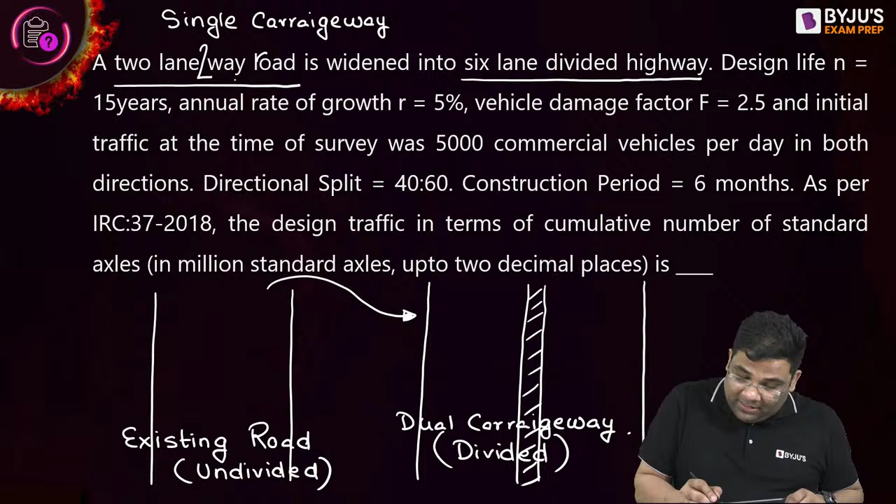Or I can say it changes to a dual carriageway. So if that happens, will I consider the lane distribution factor as per the first road or the second road? Tell me, it has got widened into what? So you can see this was a 2-lane single carriageway road.

It got converted into a 6-lane divided highway, meaning a dual 3-lane road, right? Dual 3-lane road. So tell me, will you consider the lane distribution factor and traffic as per the existing road or the new dual carriageway road which you are constructing? Tell me.

New road, because you are constructing the new road, right? Old road is already done, Baba. Why would you construct it again? Yes, so whenever they write a question like this, that something got widened into something else, you will take the new road as per which the parameters will be set.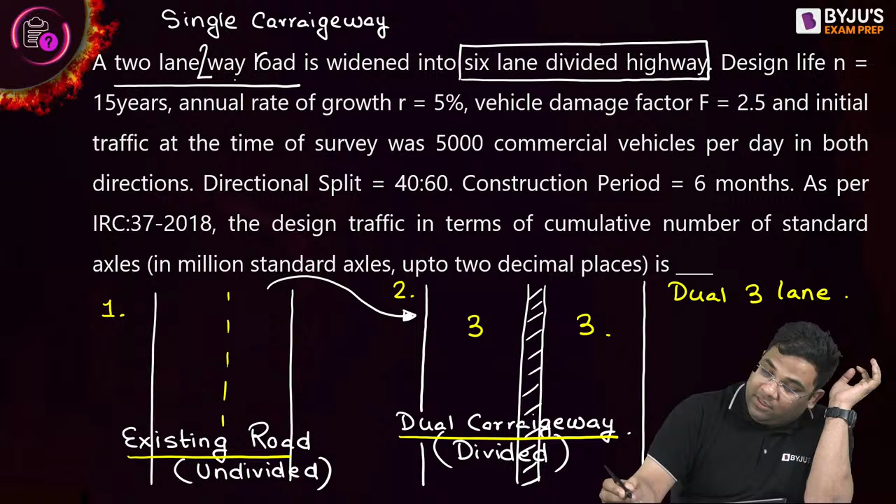Understood this concept or not? A two-lane, two-way road is widened into a 6-lane divided highway. You understood this language or not, and as per which one will you take? The new road, right? Because you are constructing the new road. The old one is already done.

Yes, so this is, I can say, dual 3-lane. I can also say dual 3-lane, right? Very good. Now you see, the design life is given as 15 years. Growth rate is given as 5%. Vehicle damage factor is given as 2.5. If they don't give it, how to find out? I have explained in the other video.

It is written, initial traffic at the time of survey was 5,000 commercial vehicles per day in both directions, and directional split is 40/60. What is this? I will explain you, don't worry.

I'll explain, don't worry. Now, first of all, tell me, is this given as P or A? Tell me, is this given as P or A? It is given as P because at the time of survey it is written, and construction period is also given. It's given as P.

So what they are writing, you see, they are writing that now do as per the divided, because we have to consider divided, okay. So they are telling that the total traffic P is how much? 5,000, yes, in both directions, right? In both directions.

You see what is written here? You see the language again? It is written, initial traffic at time of survey was 5,000 commercial vehicles per day in both directions, and directional split is 40/60. What is the meaning of this?

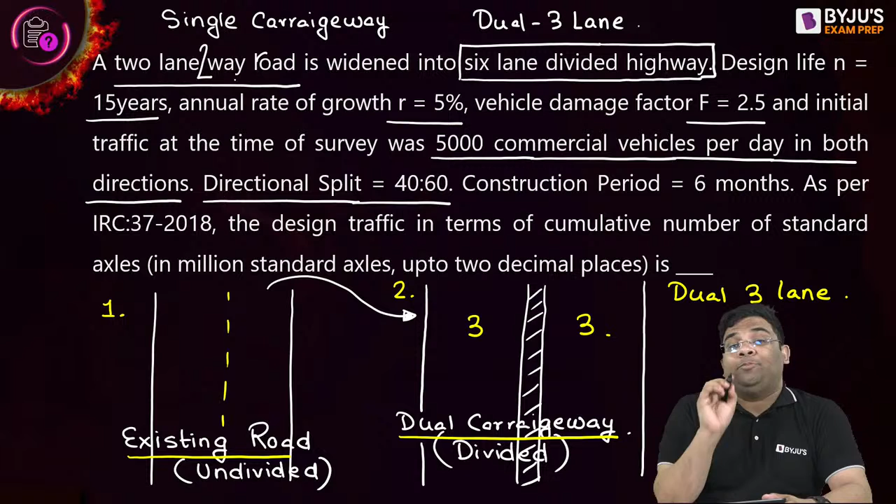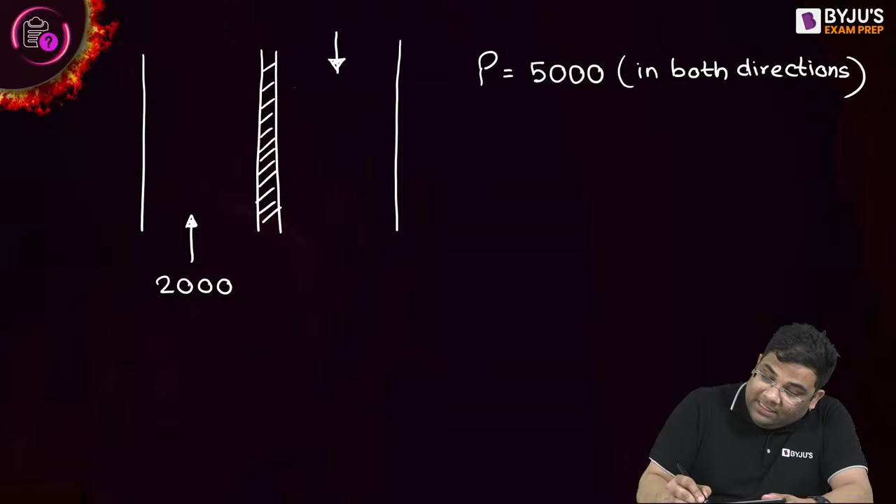The meaning is, in one direction 40% means what? 2,000 vehicles will go. Other direction there will be 3,000. Understood? What is the meaning of this 60-40 split? Understood everyone?

Yes, so they have given the total traffic in both directions as this and this. Now tell me, I can say this is P1 and this is P2. Okay, now this is not P, this is only given for both directions. Now tell me, when I am taking P for the design traffic, how much will I take? I will take 5,000 or how much? Tell me, for the calculation, how much will I take?

Yes, I will take what? 3,000, the maximum of P1 and P2. That is how much? 3,000.

I'll again explain this. See, initially there was a 2-lane undivided highway. Now we are going for a 6-lane divided, or I can say dual 3-lane. Now the data given is 5,000 in both directions. Yes, this was there when it was undivided. Now it has become divided. So when it becomes divided, then it is given a 60-40 split. So one direction 2,000, one direction 3,000.

So when you are taking P for calculation, you will take how much? 3,000, because now it is a dual carriageway, and in constructing the dual carriageway, we take P as the maximum of P1 and P2. Understood? Very good. Now everything is there.

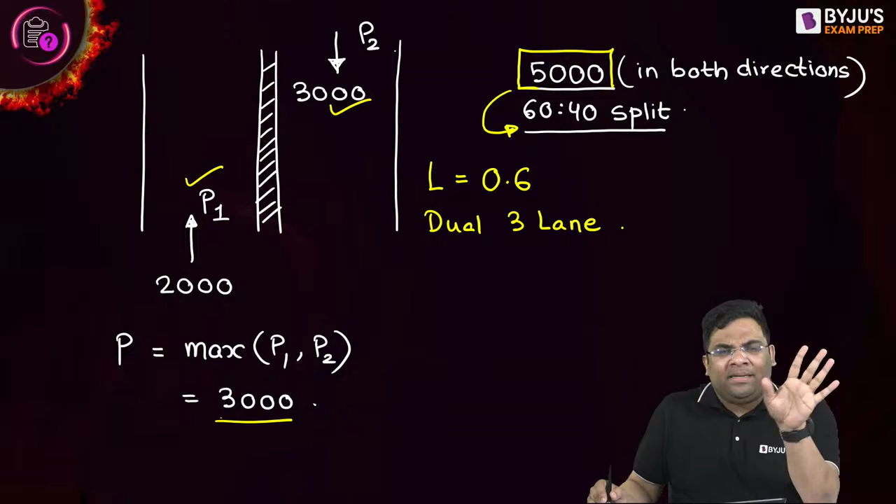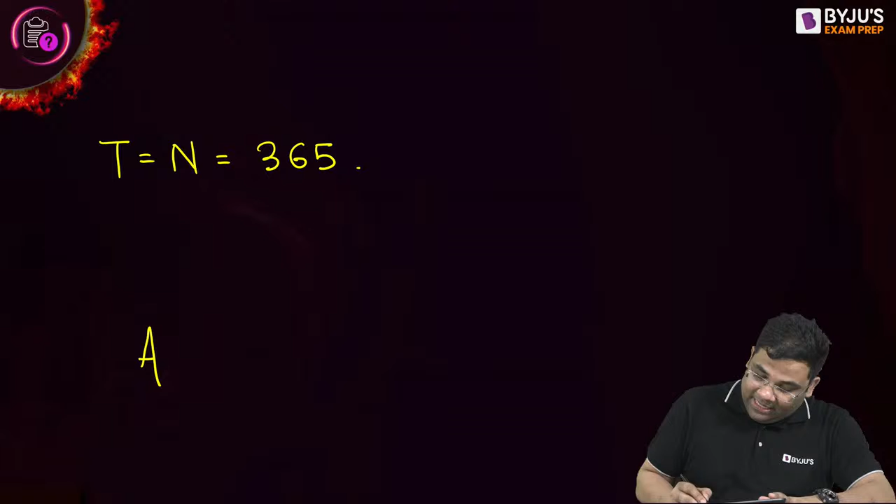So game over. So I can say design traffic or N will be equal to how much? N will be equal to 365. But for that, first I have to find out A. A will be P, which is 3000. The construction period was given how much? Given as 6 months, meaning 0.5 years. And the rate of growth is 5%. Construction period is given as 6 months, that is equal to 0.5 years.

Okay, so how much A are you getting, tell me? How much A are you getting? Calculate, tell me what is A here. See, on the first two questions A was given, right? A was given, but here A is not given. So the first question A was directly given, here A is not given, so from P you have to find out A first. You are getting almost

3074.1. Yes, so I'll use this 3074.1, then 1.05 to the power of the design period. Design period is how much? Design period is 15, and vehicle damage factor is 2.5.

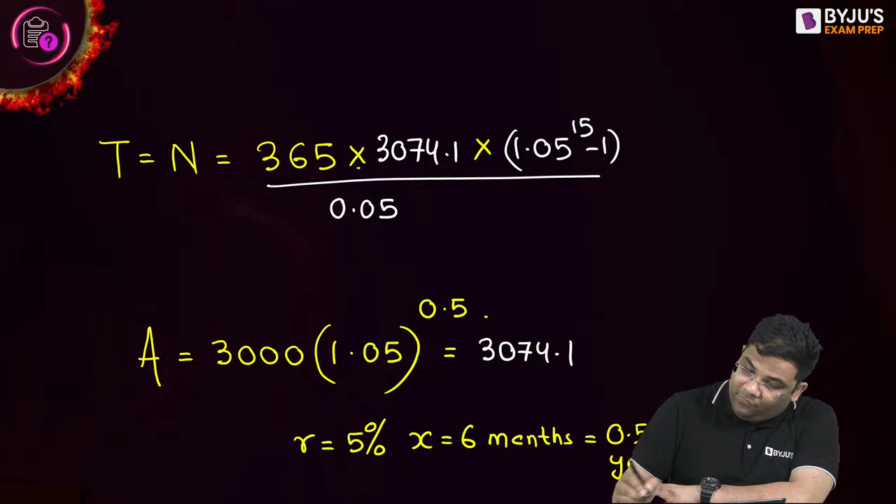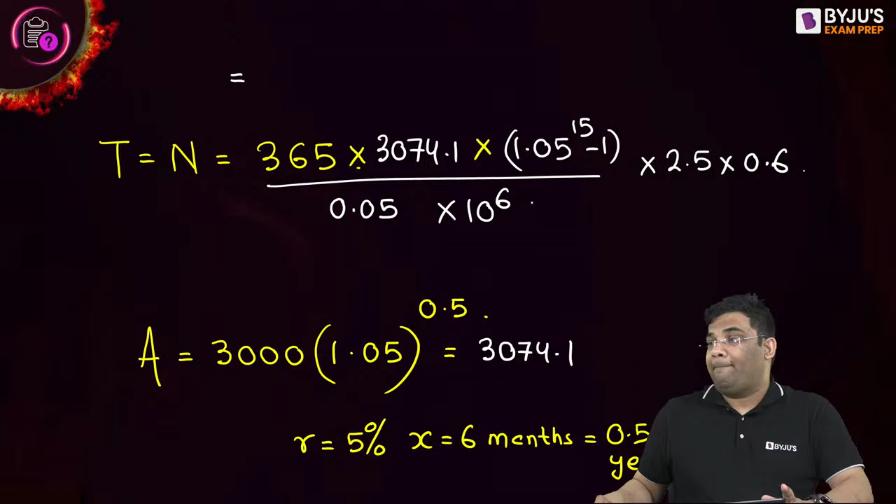So 15, divided by R, then 2.5, and your lane distribution factor is 0.6. So divided by 10 to the power 6 to convert into MSA. So how much are you getting in MSA? What is the design traffic here? Yes, very good, 36.32 MSA.

So you can see that all these questions from design traffic which we solved can be tricky. I have explained it - if they are very merciful, you will see this formula directly.

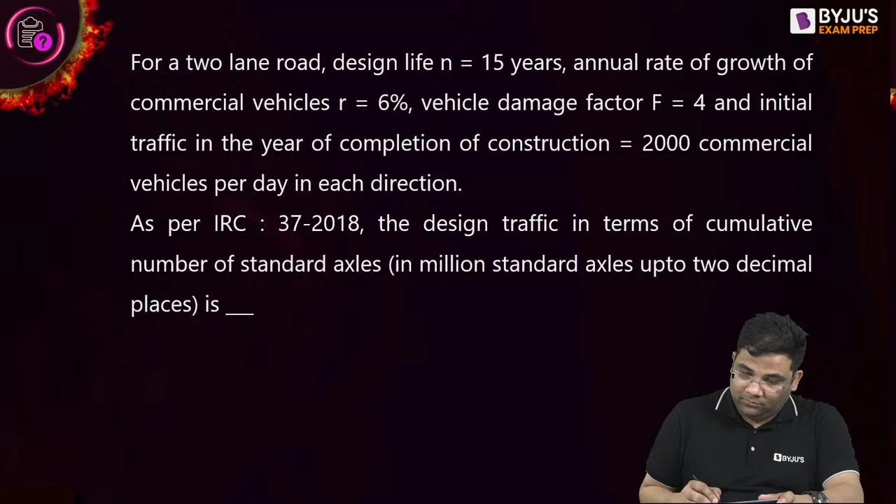So I'll give the closing remarks. The class is over. So 365A, 1 plus R to the power N minus 1, divided by R, into your lane distribution factor, vehicle damage factor, and then divided by 10 to the power 6 to convert into what?

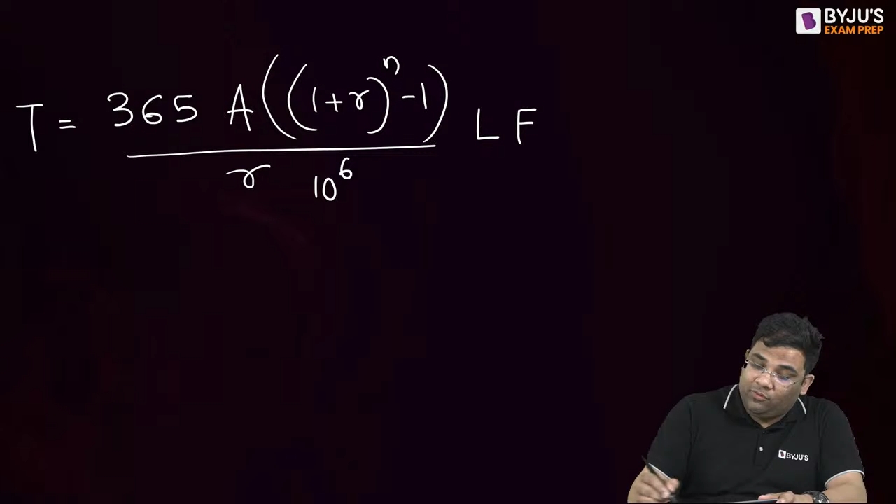MSA. So if they are very merciful in the examination, directly they will give you A, R, N, L, F, and then they will tell you to find this out. They can do that also. Very easy question also they can give.

But if they want to complicate it, they can complicate with the lane distribution factor. So you should know how to find out the lane distribution factor, which I have explained today.

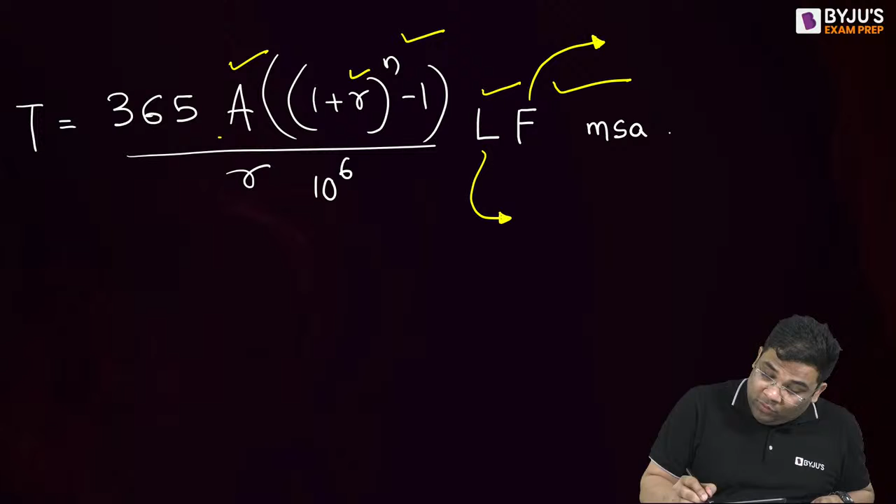If they want to complicate, they can go for vehicle damage factor. You should know that - I have explained it in the other video. And they can also play around with your A. So these three things you should know how to find out.

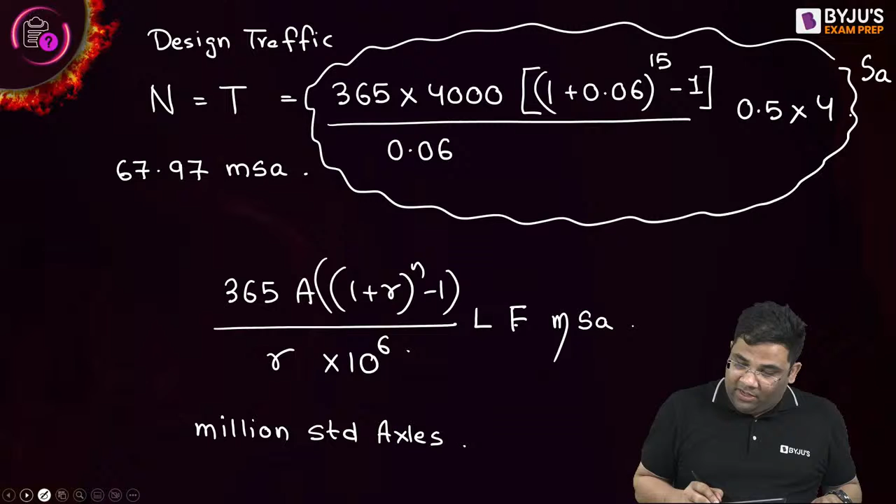And this is the end of your design traffic. So this was a very interesting video we did today on finding the design traffic for flexible pavements as per IRC-37. We saw how our understanding is developed from the code, and we also saw the direct codal provisions which gave us confidence.